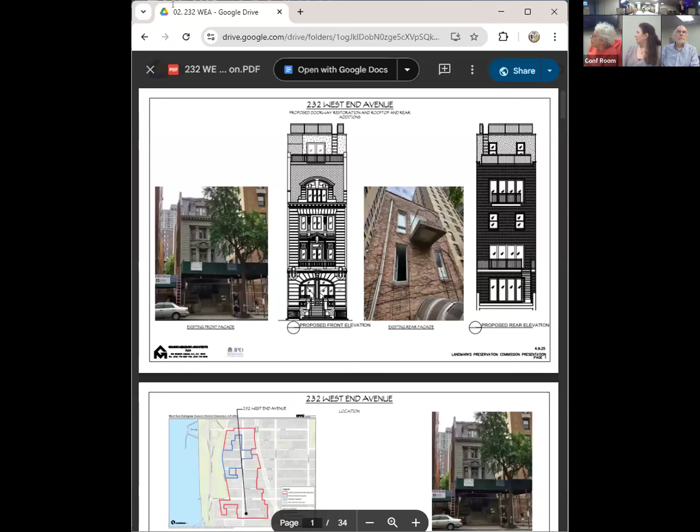I live across the park - do you want me to just go home, get my laptop and come back with it? We can see it on this laptop, but it can't project on the screen. Is that the problem? Yes. Do you mind if I take a quick look? I don't mind if you take it home with you - that's why I came and robbed you guys.

Still no signal. No signal. Jessie, who's been in and out of our room with our staff member, is quite the expert at all of this. But obviously it's not just this tonight.

Oh hey, okay, all right then. It got the menu - magic touch, it just wasn't plugged in all the way. So I'm going to sit here and advance slides. All right, you're the hero of the night. Isn't it the first thing on the list, make sure it's plugged in?

So hello everyone, my name is Jackie Peu-Duvallon. I'm the preservation consultant on this project. This is 232 West End Avenue, a Beaux-Arts style mansion located on the east side of West End between 70th and 71st Street. The proposal is pretty simple.

It's to replace infill at the entrance and on the front facade, to construct a rooftop addition, and to remove a rear addition. Currently this building - try not to touch this - here you can see it located on the block plan. Most recently it was used for an institutional purpose, and for that reason, my understanding is it was able to get this very large rear addition that currently extends to the rear lot line.

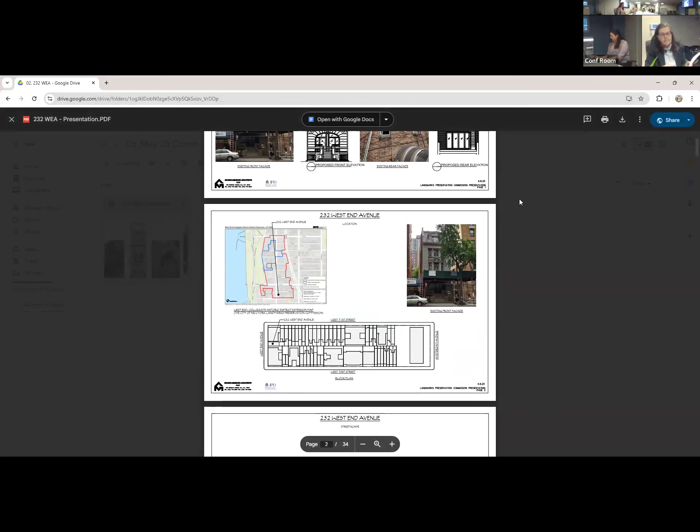If you're going to go to the next one, just let me know - I'm actually sharing from my computer. Sorry, next one please. Jessie, can we get full screen?

That's all right. This is good enough.

In any case, it was serving an institutional purpose, so that's why it got this large rear addition, but now it's returning to residential, and that is not going to be allowable by zoning, so that's why it has to take off the existing rear addition.

So here's the entrance that I was talking about. Unfortunately, any vestige of historic entrance infill is gone, and it was replaced by this institution prior to designation with really just glass walls and glass doors. So that's what's photographed here.

But yeah, so because this is the best photo we have and because it's hard to extrapolate what exactly was there, that's why this part of the proposal also has to be presented at public hearing. But our intention is to try to replicate what was there originally.

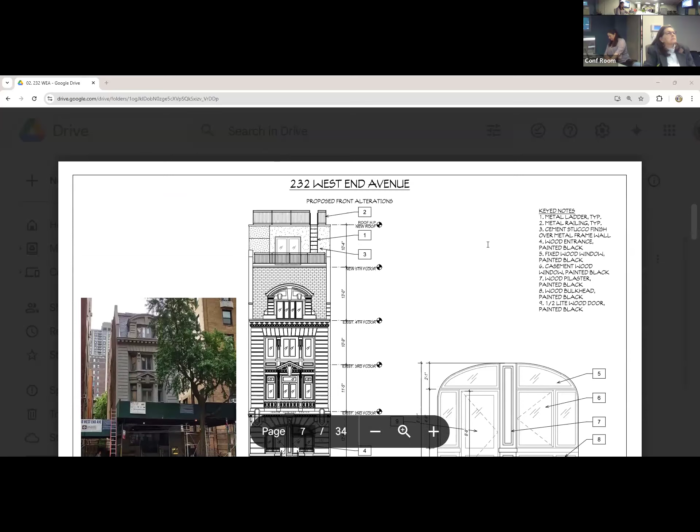Okay, so here's the proposed condition, the full building elevation and the close-up elevation. So again, it'd be a door with a solid panel at the bottom to match the panels underneath the proposed windows, with that wide center mullion.

So all of that is new, replacing what's there now, trying to replicate what was there originally, as far as we can tell. Is it offset, double doors? No, it's a single door, the others are fixed. Just the one wider window would be operable, swinging out, but the windows on the sides would be fixed. Off-center door, center panel made of wood.

It looks like only 3 floors were original. Something happened to the roofing that you can see on the left in the picture. So it's kind of a hybrid. Is the roof in question? Well, yes, we're proposing a rooftop addition, but that's the original roof, that mansard with the arch. So the question is, this application will go from where the top curved window upward will be new - a setback rooftop addition.

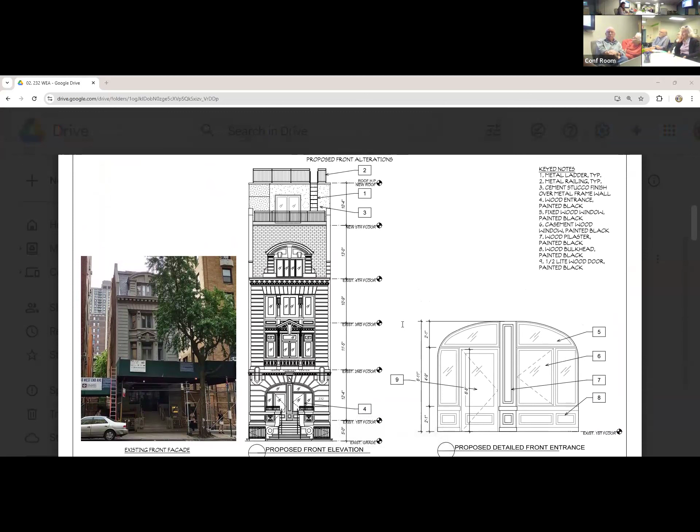How far back is this panel door and window setback from the step? Well, it is essentially an exterior porch. It's going to be set back to where we think it was originally, which is about 2 feet back from the opening. Currently it's about 2 feet at the front of the facade, but no, it's set back further - the existing glass walls and glass doors are already set back well into this. And would it be the same setback? Yes, same setback.

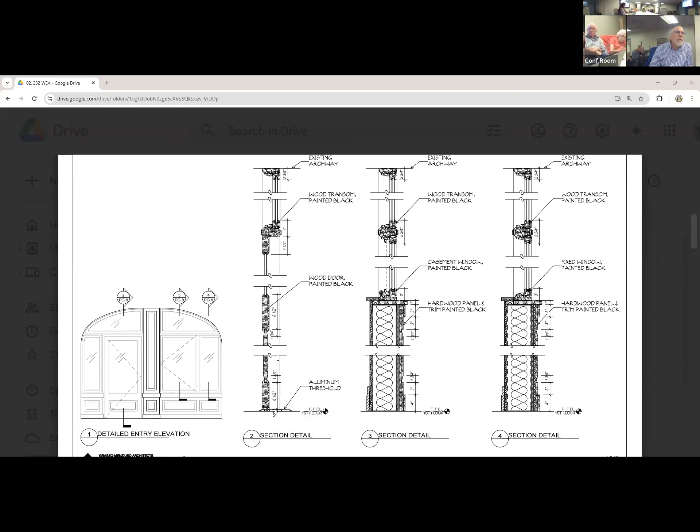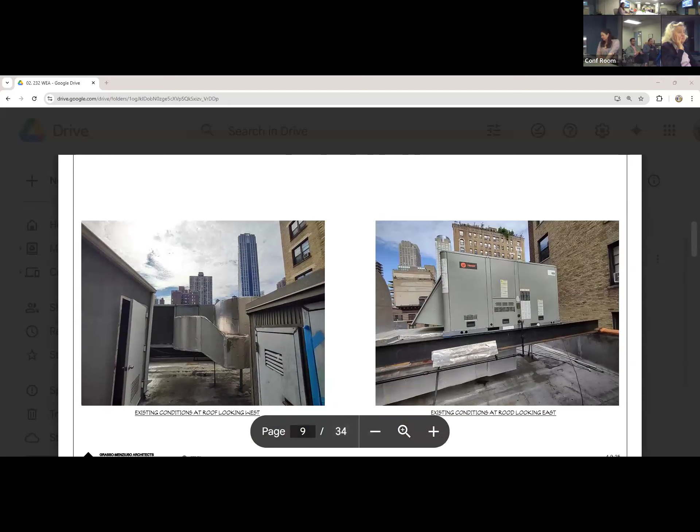Okay, so now we get to the roof. There's already a huge conglomeration of mechanical equipment on the roof. It's actually pretty difficult to even walk around the roof, so these are the best photos I can get. We have a bulkhead, mechanical enclosures, ductwork - it's a very, very busy, packed roof already.

Right, okay, so the setback - should we call it the roof terrace? The proposed roof terrace is essentially the setback. Yes, say that, yes.

And this addition then would be a bedroom and a bathroom and maybe some elevator. Questions about the elevator - it's kind of tiny, is that going to be modified? And will that go up to the roof? Because right now it looks like it does. Yeah, there is an elevator now. And that will stay, so the bulkhead and everything will remain? Yes. There's an elevator and staircase in there now, but it doesn't go up to the roof - it's going to extend to the roof. Yes, got it.

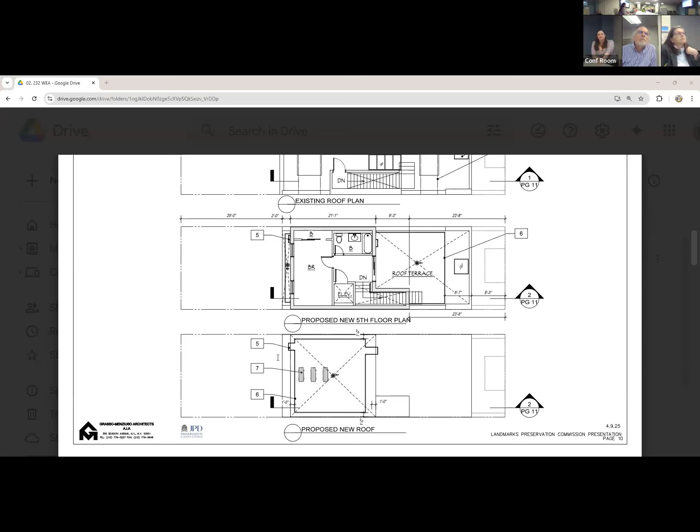Thank you, next slide please. So here are sections through the roof, existing section, proposed section, to show you the heights of the addition - about 10 feet tall, with mechanical equipment on top of it and railings on top of it as well.

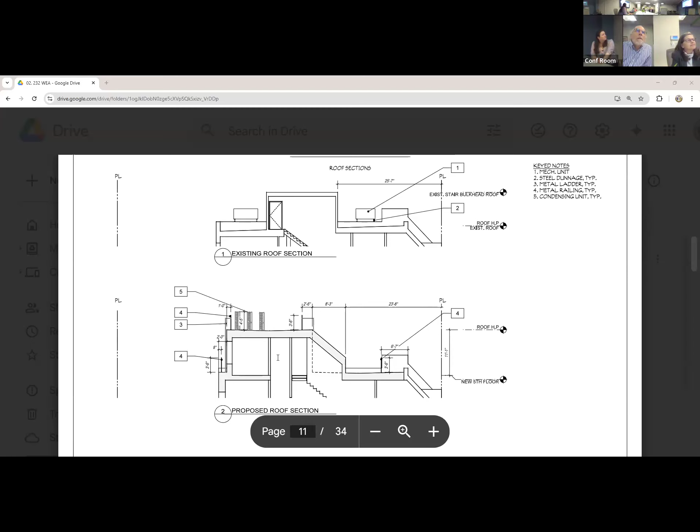See how it's being angled back to minimize any visibility over the front facade, and set back 2 feet from the rear facade. This is a somewhat unusual brownstone, sitting in the middle of a block flanked by two large apartment buildings, with a small alleyway on each side. That's the reason this rooftop is visible, because of these two alleyways, so you can kind of see it up there.

So what materials on the two sides are going to be visible? Stucco. What color? It's the cream colored stucco, but we can adjust that. You're welcome to give your comments on that as well.

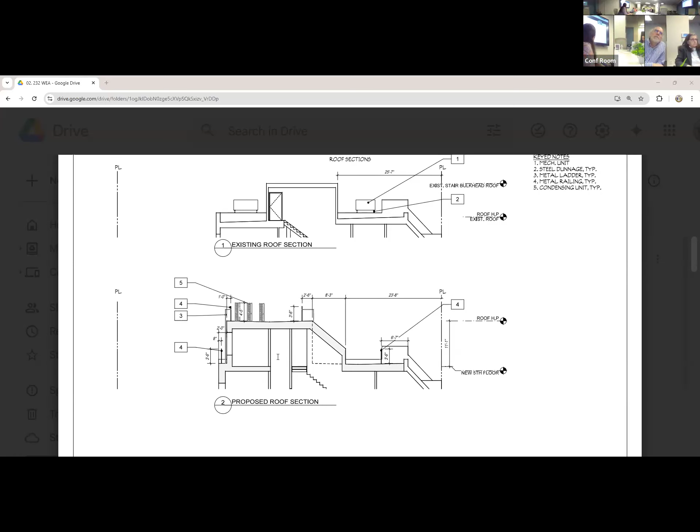Should I move to the next slide? So, existing and proposed west and east elevations, looking at front and back. Why are there doors on the west? Because that goes to the terrace at the front of the building, facing west. The rear is very close to the rear facade, not the lot line, and just has 2-foot windows, a 2-foot setback, which is a dimension Landmarks has approved many times for rooftop additions.

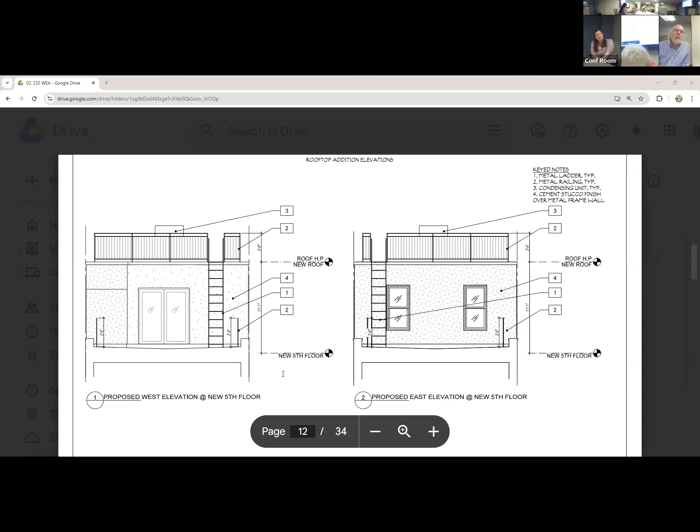And then a ladder from the fifth floor addition up to another level, just to be able to service mechanical units on top. So it's not used as a terrace up there on top, it's just where mechanicals would be kept.

And what material would the railing and ladder be? It's painted iron. It's a ladder, not stairs, just painted iron. What material is the whole facade? It's limestone.

So it's a gray line. What would the West End Avenue facade be? The same color stucco, so a cream colored stucco, but set back, so not visible from the west. Visible from north and south as you're going on West End Avenue.

So this is a sightline study documenting that when you're standing directly across the street on West End Avenue, you don't see it. It's when you start moving to one side or the other, because you're seeing it on an angle.

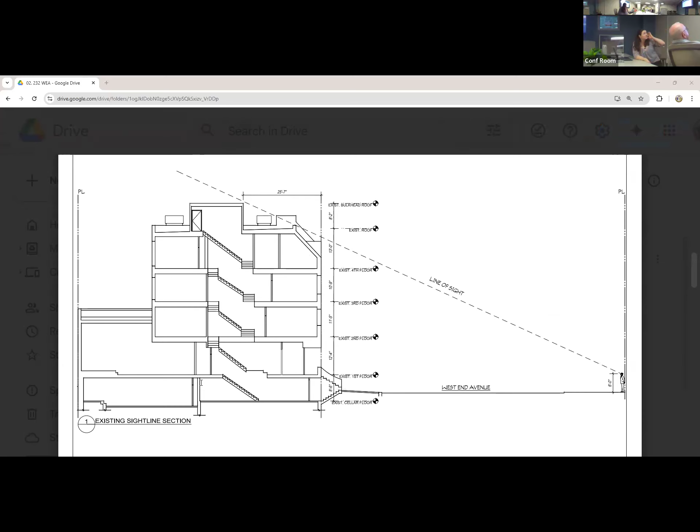So this is our existing building section, and just so you can understand, that's what the gigantic rear addition currently looks like, that's going away.

Okay, so here's the proposed, again showing the addition angled back to limit its visibility in conjunction with the front facade when directly across the street, and the removal of the rear addition at the back. The red dotted line indicates the volume of the existing building. So when the rear addition is removed, what does that leave as the depth of the rear yard?

Hopefully we have that on another plan, I don't remember exactly. Because it's on an avenue and not a side street, it may not be the typical 30-foot setback. What we'll replace it with is just a brick facade, and you can see an open deck with a stair going down into the backyard.

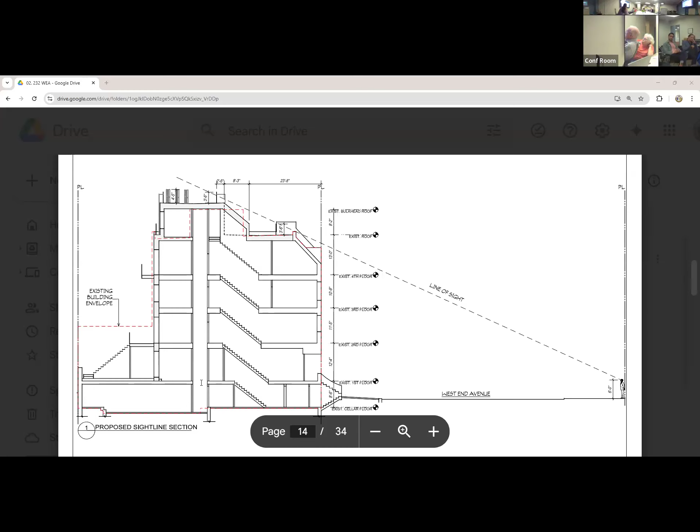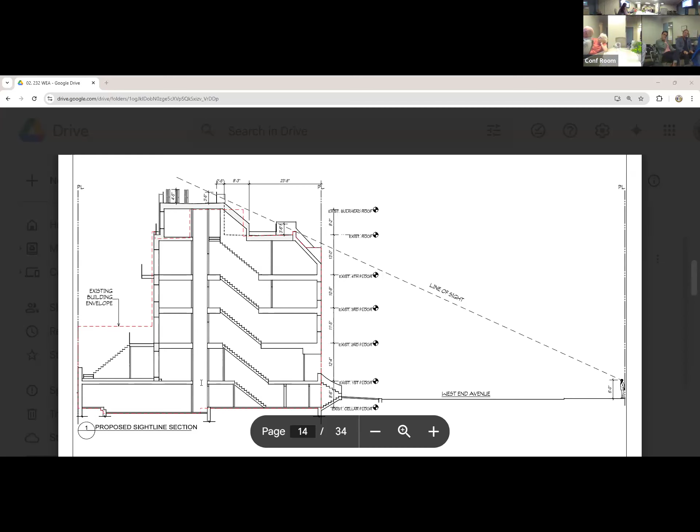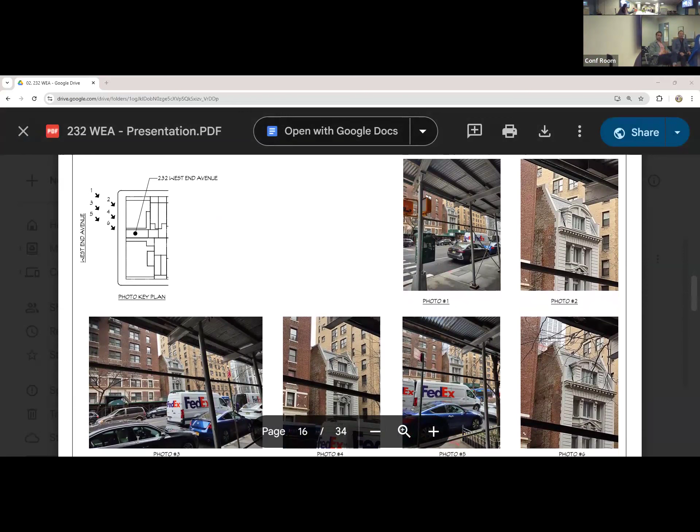Okay, so now these photos are taken walking north to south. We're at the corner with 71st, and as you can see, I had the regular shot and then the zoom-in shot next to it. So as you're progressing south, this is what you see, pretty much.

I would note that the existing mechanicals are themselves, from many angles, already visible. What you're seeing is this gray massing, that's the existing bulkhead that's there. This is existing ductwork you're seeing over the front facade, that's going away.

So this ductwork is going away, but this will become the railing on top of what would be the new addition. What I'm trying to point out is that you have an existing addition that's already visible there. Those side walls are just old brick stucco.

Are you talking about the full facade? The full lot line wall is brick, of course. This bulkhead that's there, are they going to do anything with that brick? If necessary, I might point it. That's about it. It's a lot line wall.

So there are no windows on it, even though there are two alleyways between this building and the others, there are existing lot line windows. You can see them. But there's no work proposed at the lot line windows in any case.

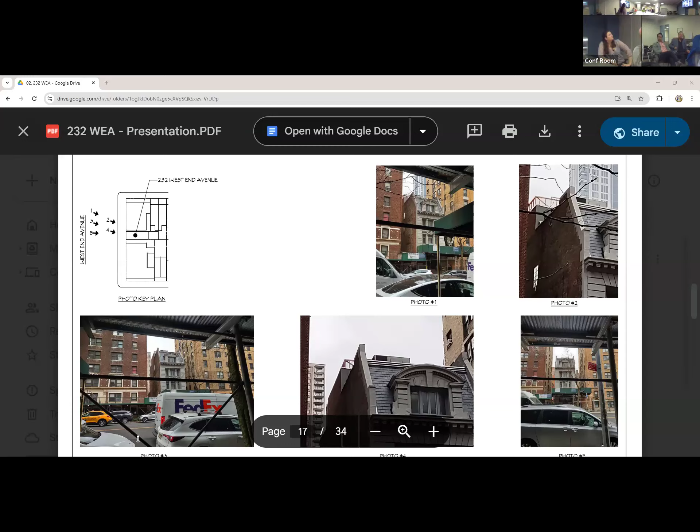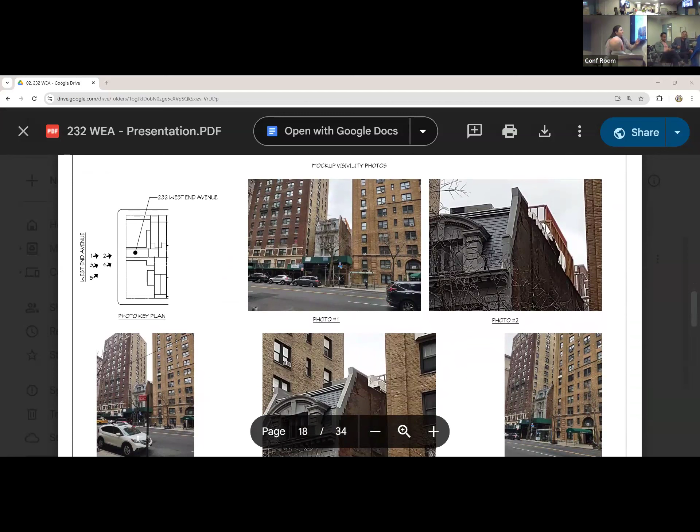Next slide please. This is as we're walking further south to show you what becomes visible. Again, you can see there's existing ductwork visible, and that ductwork would go away, leaving just a plain cream colored wall. This ductwork here in the front would go away.

Next slide. As we progress more south, it starts to get blocked by that neighboring apartment building. The last two photos on the right show that you do see a bit of it as you're standing on the sidewalk next to the building. It was hard to get that photo because of the sidewalk bridge that's there, so those were the only two points where I could stand and see something.

Why is there a sidewalk bridge? Has it been ongoing work? It's on the neighboring building, nothing going on with this building right now. The neighboring building is obligated to extend it. We're going through it now on both sides. Don't ask, we have lawsuits pending with our building, the two brownstones on either side, and the other apartment house on the corner, making lawyers happy.

Are there any more slides? I think I just have a little bit more, we'll just wrap it up. Next slide please.

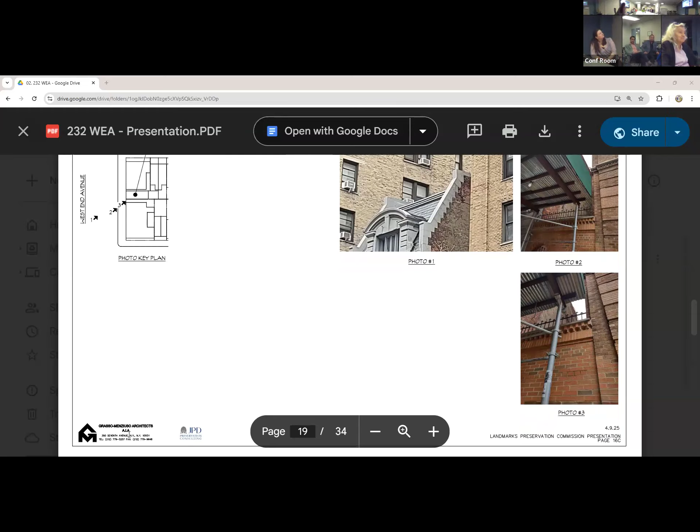So this is just a block plan to show you where there are other existing rooftop, one-story rooftop additions within the block, so we're contextual in that respect.

What's the height, one story? You mean in terms of feet of these other ones? No, of the house. Sure, it's about 10 feet, 10 feet.

So the crosshatched area on your building, that's the rooftop addition? Yeah, that's the proposed one-story addition. And that is actually telling us, if we could measure the depth of the rear, what the rear yard is, which is about the same depth as the rooftop addition, whatever that is.

I don't know if this is to scale, but the rectangle behind it is your rear yard. Right, which will now be your rear yard again, nothing built on it, other than a staircase down, right? Right, an open metal deck and a staircase down.

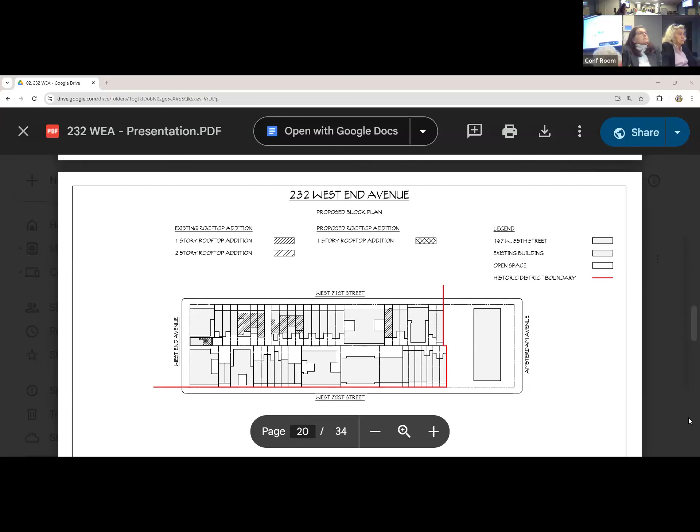Next slide please. So this is as much of a photo of the rear as we can get. This is what's existing at the upper floors, and this weird round thing, we call that a skylight. That's the current roof of the two-story rear addition that now extends to the rear lot line, which is going away.

What about that diving board balcony thing? We are proposing to keep a balconette, not that particular one, but to replace it with something else, similar projection, yes. So next slide please.

Can I just ask quickly, is there a fire escape planned? How are you going to be handling that, or is there enough room between the sides of the building? I don't have an answer to that. As far as I know, this meets egress requirements, if that's what you mean.

Just if you could verify what that is, because these are kind of difficult projects to come into. Well, this would be a one-family house, that's what I was gonna ask. Probably so, doesn't that still require it? It still does, under certain codes where you have buildings up against open windows and things like that. But it looks like you're making a lot of changes on the rear, with a wider balcony and a set of four conjoined windows.

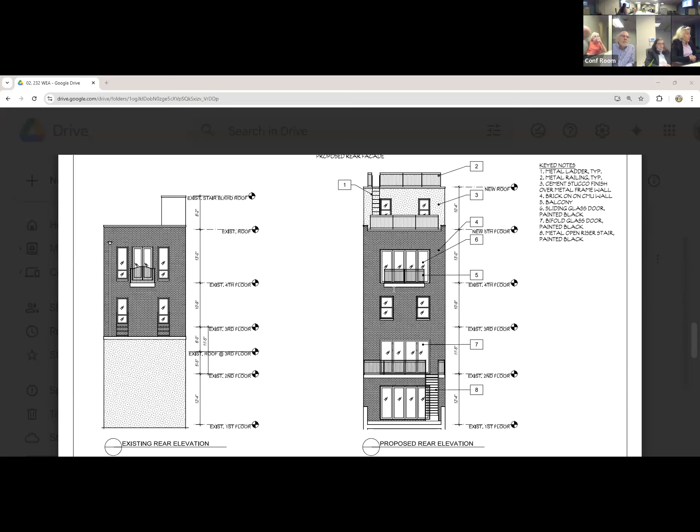Next slide, please. This is just a plan for the existing rear yard, which is really the roof of an addition, and the proposed rear yard.

Jackie, why would it be entirely hardscape? In this committee, we try to really encourage not just permeability between pavers, but greenery. I don't have that answer, so if this committee suggests introducing it, we always suggest it—I mean, there's not a tree, there's not a bush.

And it's not clear to what extent these pavers are green, native grass. You know what the pavers are proposed to be? Bluestone. But how would they be sitting? On sand. With mortar or? No, just sand—it's better, 2 layers of gravel and then sand between. All right, well, I suspect we're gonna propose some green.

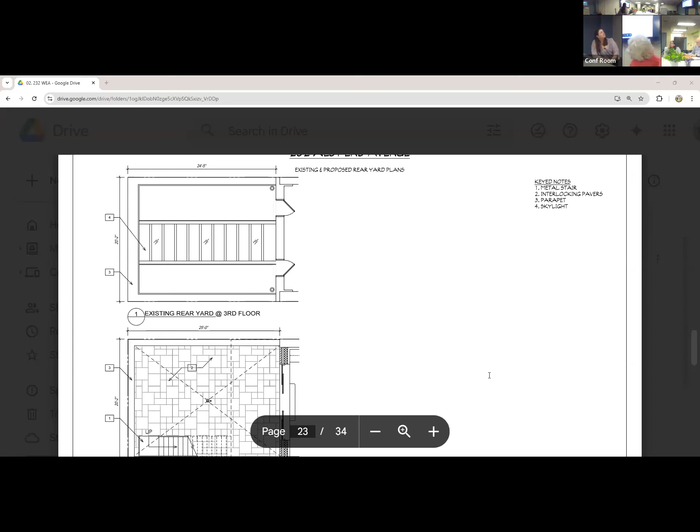And at the back, it would just be an open stairway and a deck. If this is accurate, and you're removing the big volume over there, it looks as if this protruding balcony and the stairs go almost to the rear lot line, so that whole paved rear yard has this balcony and staircase looming over almost all of it. Is that right? No, that one looks like a third.

Not really—isn't this all the paving area we saw? Yeah. So why does it go so far back? Because you have to have a balcony that comes out enough to be wide enough to be accessible, and the staircase has to be wide enough, with the rise and run as required. This is totally appropriate and totally normal.

Staircase has to be at a certain perfect angle. Yeah, that makes sense to me. Any more pictures? I think I have at least a conclusion coming. I think we're almost done. Good, next slide please.

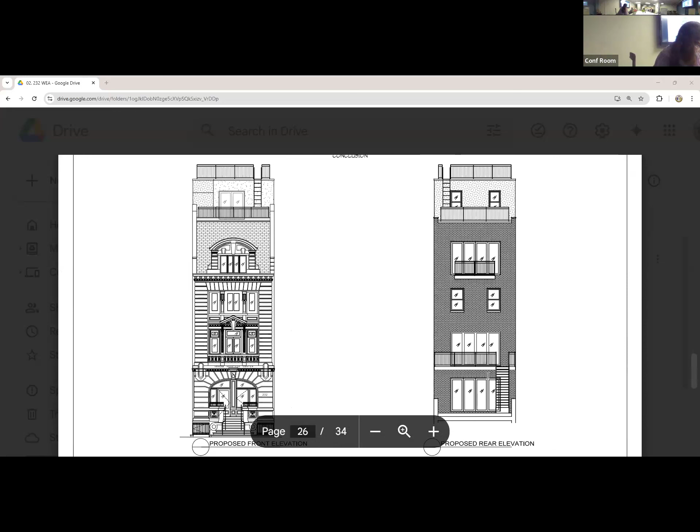So, to me, this is pretty sensitively approached work, where they're trying to restore the front facade to its original condition, create a rooftop addition that will be visible, but hopefully recede against the sky, being a light color. Also not be that much of a departure from the size of the additions and various mess of mechanical units.

I'm going to ask it anyway, even though it might break your heart. This building has enormously beautiful stone, et cetera, and then you go to the top - first the penthouse, and then the iron railing. Is there money or desire to put something that doesn't look like a barbecue in the park? Because the building is really very pretty.

The railing setback you see on top of the mansard roof, is that what you're talking about? That's not going to be visible. The rooftop addition will be visible, but the railing itself won't actually be visible from anywhere - I live across the street, like a block away. West End Avenue is not wide enough for you to see on top. You can't see anything up there, even from down the street. If you go to the third floor of the building across the street, fine, you can see it, but there's no way to see that from the street.

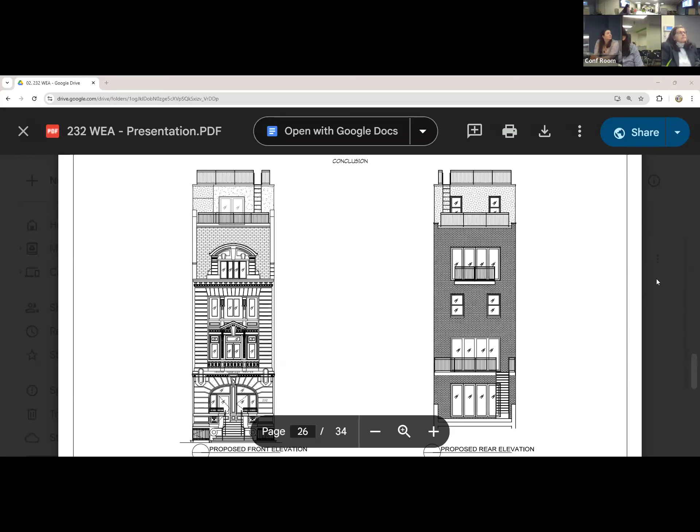I trust your eye. Thank you. Okay, any other questions, comments? Let's take a vote.

Are you guys here to make - what about discussion? We're asking you to comment. No, you asked for questions. Should I exit? No, I didn't comment. No, you can hang out, stay. Okay, if you want to leave, you're welcome to, but it may be helpful if we have questions. Yeah, that's fine.

I have a comment, which actually relates to the question I asked about the side. To me, the most unattractive part of this project is the old brick walls. So anything that could be done - generally we don't favor painting brick. I think it's important to have the brick there, that's the original brick. I think doing something to that would be counter to historic preservation. The Landmarks Commission definitely wouldn't want the brick painted.

Yeah, because that's bad for vapor permeability. I'm sure the owner will clean them, or point them, do something. But it's in pretty bad shape. When I looked at it, the brick looks like normal brick you'd have on a side yard - the row house was built, I assume, with other row houses next to it that came down, so that's the original brick. Is it as discolored as it looks in the slides?

Yeah, but I think you run into this problem where, if you - we already have this problem on the Upper West Side - when buildings do brick replacement, they replace it with clean brick and then it looks worse. I live in a building like that, and we're doing more of it. I think we should just leave it where it is, and if in 15 years the owner decides to clean the brick, great; if not, I think it looks fine. But he's going to have to clean the brick anyway, because there are going to be crevices and issues.

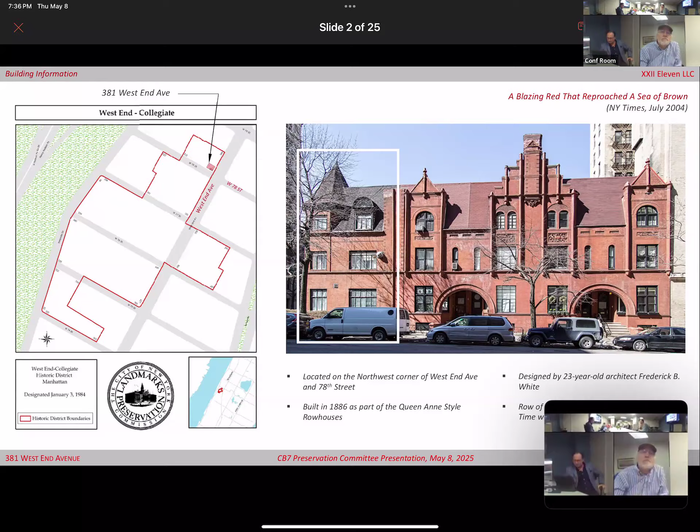That brings us to 2018, when the board had a resolution on this building. You heard the previous owners and the previous architects. The previous architects did a fantastic job, by the way. I was very happy with what they designed and what they presented.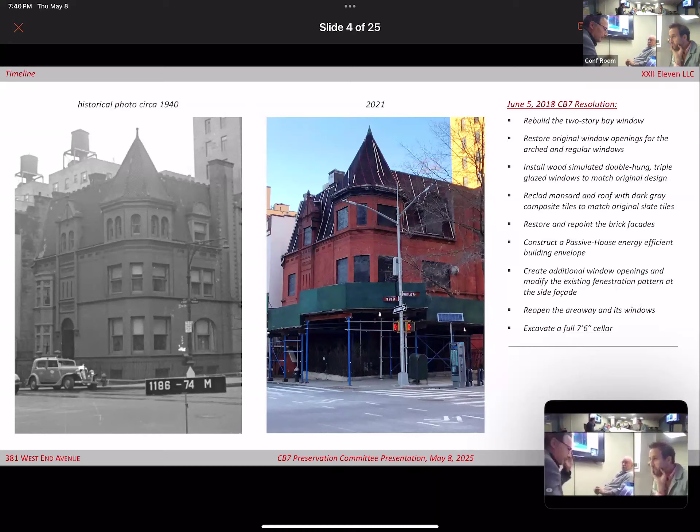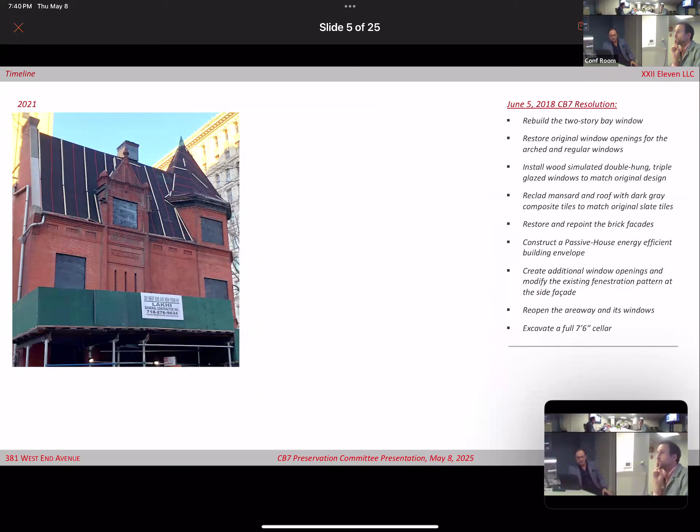So I want to bring you through some of the restorations that we made today. This is how it was in 2021. This is how it looks now.

What's the material of the roof? Is that slate? It's composite.

We rebuilt the two-story bay window, as you can see. We restored the original window openings, highlighted on the right, but they're hidden on your screen. We installed wood simulated double hung triple glazed windows.

I think what I loved about the previous design was that they designed this passive house style. Everything is insulated. Usually we were taught that the house should breathe and have openings, but this house does not breathe. All the windows are triple glazed, all the walls are triple insulated. Obviously we introduced fresh air to circulate, but it's a very low energy demanding house.

You didn't go geothermal with it. I did not. Got that basement? No, not anymore. So we reclad the mansard.

I think it's just a loose connection. Give it a second. Oh yeah, it's coming. Okay, great, I think you just tripped on it. Yeah, good. Perfect, we're back. So I'm gonna try not to touch anything at all. Right, it's a real loose connection.

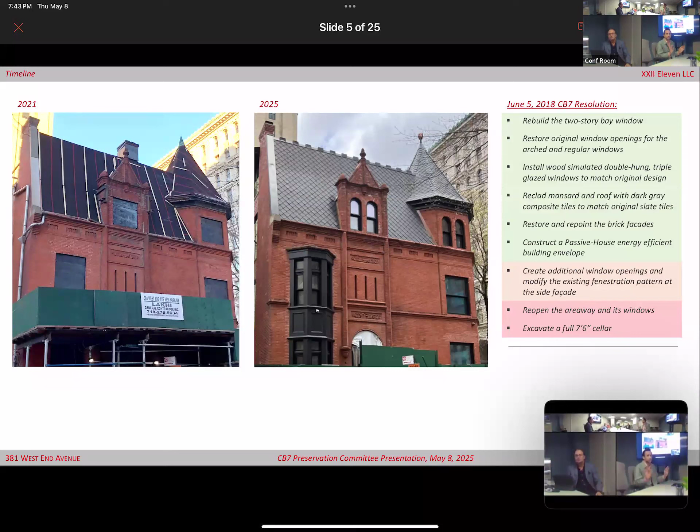So some additional items added during the restoration. We structurally rebuilt this dormer here, this south dormer. As you can see, it was really in bad shape. It was held on by stitches, so to speak. So we had to bring it down brick by brick and then rebuild it to mimic the old layout.

We reconstructed the cornice detail on the turret eave. This is a picture from West End Avenue, back in 2021, and this is how it looks now.

As you can see, we rebuilt this, I call it the East dormer. We rebuilt every detail here. We couldn't really salvage what was there, it was really in bad shape. So we took the material, sent it to a shop in Connecticut, and built it from scratch, down to the small details.

And then most importantly, we rebuilt the east chimney. This is worth emphasizing: the east chimney was not part of the scope of work, it was not required to be rebuilt. Two months after we changed everything, changed the project, we got rid of that roof addition, we set it back even more.

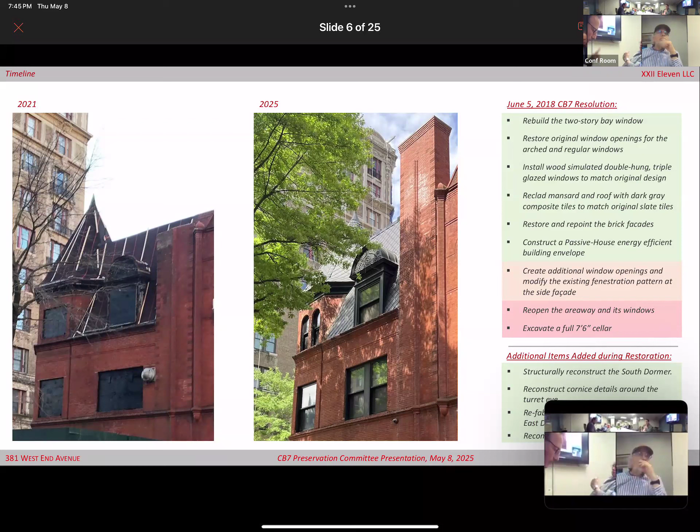All right, so in conclusion, this is how it was, this is how we found it, and this is how it looks now. It's still progress, which brings me to the first item I want to discuss today with you.

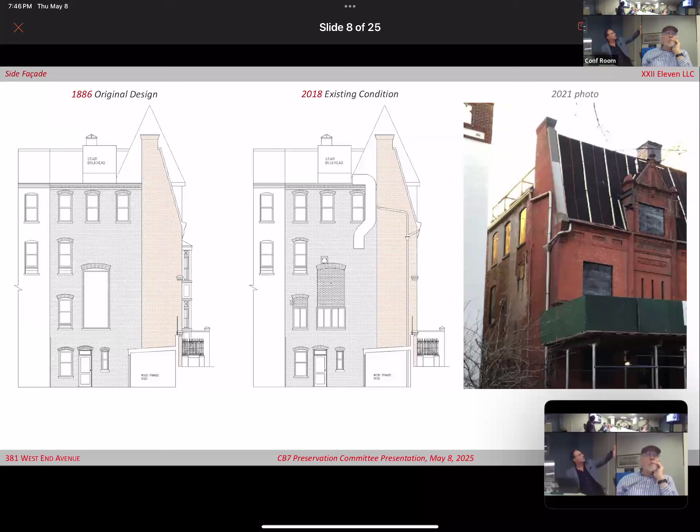It's important to note that the original design is clearly separated between common brick on that line I drew and face brick on the other side. So the architect knew that part of the facade is only this 9-foot face brick, and the rest is just common brick.

As you can see, the same architect that designed these very nice, aesthetically pleasing facades didn't really give much thought about the west facade. It was mainly driven by the interior layout.

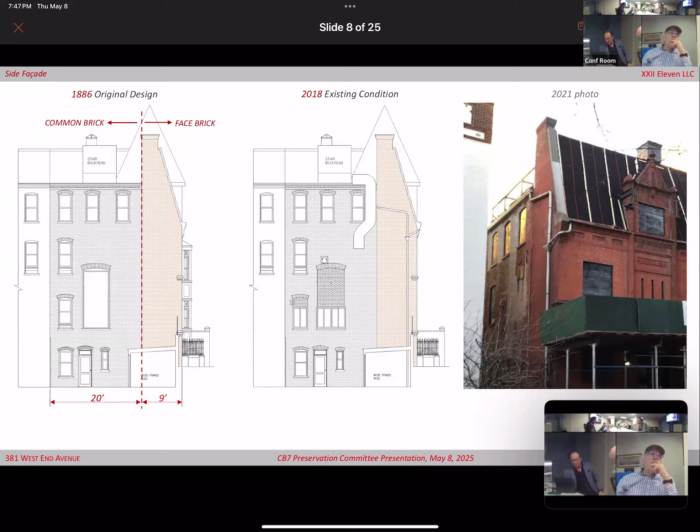Was the big window there on a staircase landing? Is that why? I think it was aligned with a staircase, but again, I cannot say that with certainty. But the former architects did the same - they basically aligned this window to serve the interior layout.

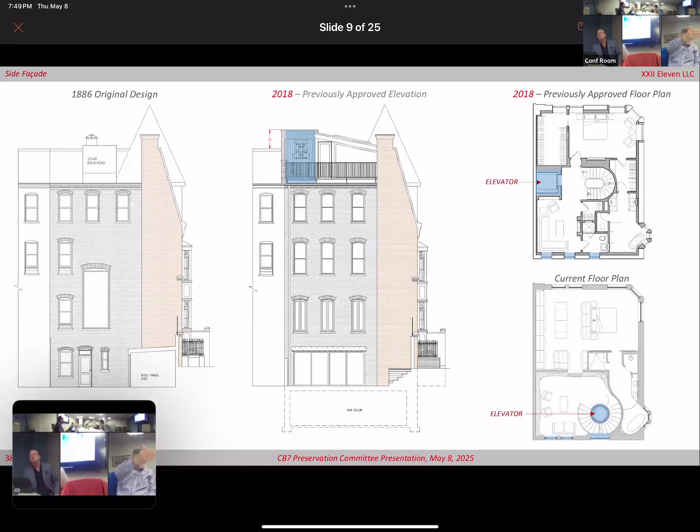Correct. So there's a round elevator or something at the rear yard - with stairs or around? Side yard, yes. How deep is that? Almost 10 feet, just shy of 10 feet. Is the elevator going all the way up to the top? Yes.

So again, this is not what we're building. This was previously reviewed. The middle is the previously reviewed version.

And I repeat that this addition here, which was 50 inches over the mansard, was disapproved by this board. It was visible, I understand why - I think it was casting a huge shadow on the neighbor, and the neighbor was not happy with it. So even though LPC approved it eventually with some modifications, the neighbor was still not happy with it, and that's how the lawsuit started.

And it wasn't built, correct, it was not built - but the elevator has already been moved. Nothing of this was built. That's the current floor plan. The project was at a standstill, it was stalled until 2021 when I took over.

Right, but when you say current floor plan, that's what's done already? Yes. Very different interior. Oh, yeah.

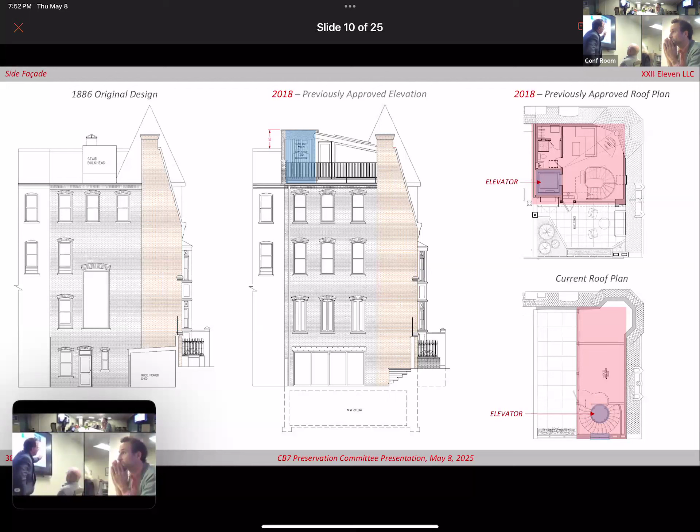So this part here and this part here are open to below. You come out from the stairs, from the third floor, you come to this level, you have an elevator landing, a stair landing, and then you go outside to the roof. So this is what was approved by LPC at staff level.

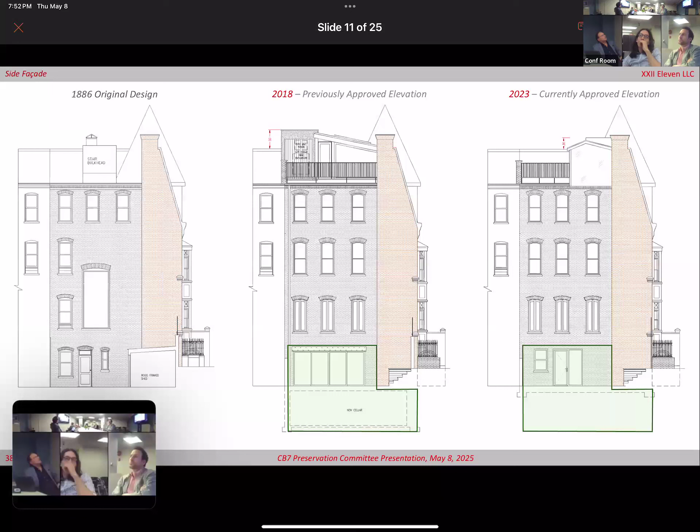So at the time, we were just trying to pay attention to that rooftop addition. We said we will not do what the former owner was intending to do. And by the way, we're not going to build a cellar. We made those decisions for one reason really, just to pacify the neighbor, because building a cellar would have required underpinning, which would have really inconvenienced the neighbors. And the rooftop—they were never happy with it, even though LPC approved it. So I said, you know what, let's just scrap both of those and simplify the design of the building.

So here we are in 2023, this is what was approved, which brings us to what's being proposed. So this is what's being proposed. Notice a couple of things.

First, we never touched the face brick part of the west side. That stays, we didn't want to play with that. We kept the same amount of windows. All we did was take this and align it with the aligned windows, in that kind of layout—just like the original layout, and I'm keeping the original layout here for a reason, to go back and compare what it was.

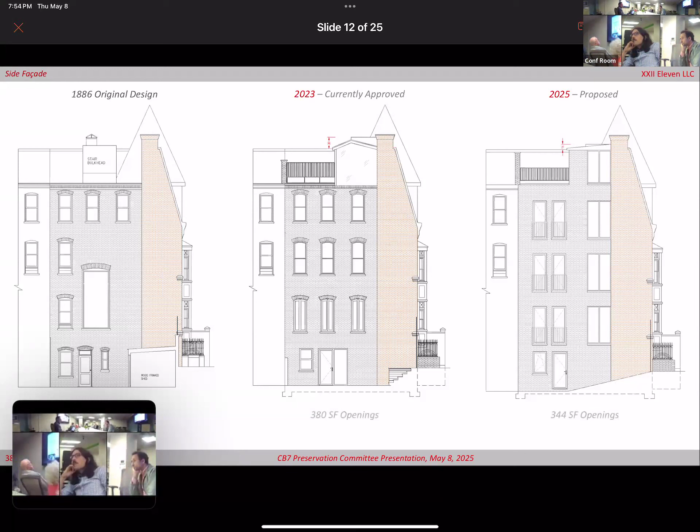This side was driven by the interior layout, this was driven by the interior layout, and this new design is also driven by the interior layout. As you can see, these windows align with the elevator, so the approach is for some light to come through the window and get reflected in the glass elevator—it's a glass elevator—and then diffuse the light indoors.

It looks like you're eliminating those that I think are original wooded windows. Yes, so it's on that floor and others, for straight rectangular modern windows with Juliet balconies over there. Yes, yes, that's the intent. I mean, it's striking to me that you've tried so hard to replicate original features on the West End and 78th Street side, and then completely un-historicize this facade.

I just took the architect's opinion—he literally drew a line there and said, this is face window, this is face bricks, and this is just common brick. No, I understand, but in my view, the original architect didn't really care about this facade. He designed this on this facade, so he clearly did not pay attention to what was going on here.

This design was driven by the interior layout. We're basically doing the same—we're driving this design by the interior layout, and this board agreed basically on how insignificant this elevation is.

But this is the hardest part of my presentation. This was already built. These windows are all—yes, so these on the left.

On the left side that you can see. So then I don't partially understand—you're coming for approval of, did you get LPC staff approval or any other approval? No, so this is a legalization. Let him explain, it's not legalization. You can term it that way.

Let me first explain why it was built. It was not built out of arrogance or defiance at all. This layout that you can see here, this exact layout, went in front of LPC together with an east chimney. When we presented the east chimney extension, we presented this as well. So LPC said, we will approve the east chimney at staff level, but we cannot approve this—you have to go to the community board for this. And we said, fine, makes sense.

But this was already built. No, not yet, at that point. This is—what year?—beginning or end of 2023, or beginning of 2024. But then it got built, so what happened? She's trying to explain, let him finish.

So I go away overseas in the summer of 2024. We were working on the visual, on the primary facades. I told the masonry contractor, just concentrate on the primary facades until we get an approval from the board and LPC on the west facade.

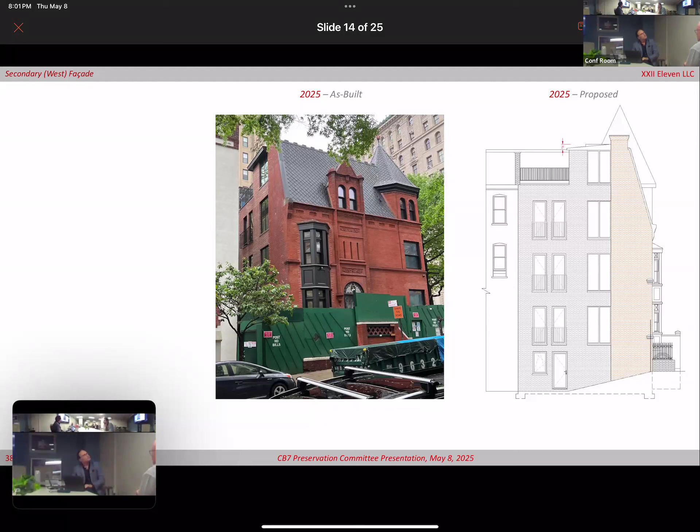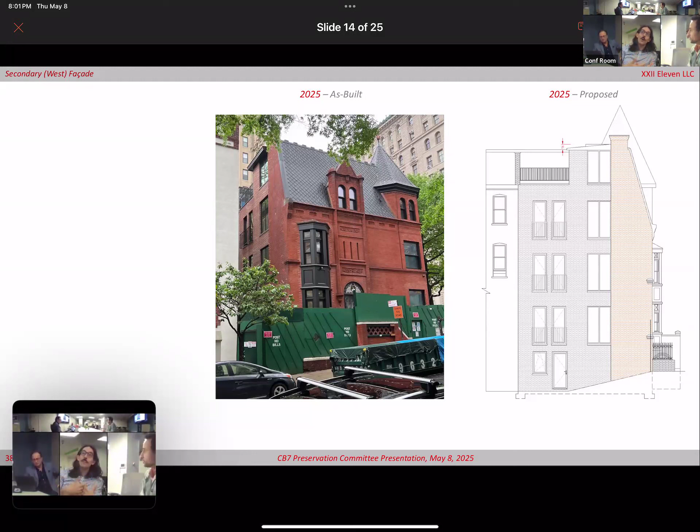I think it's a very fascinating question to understand how this happened, but for the purposes of this board, we're just gonna look at this de novo. Would we have approved this? I understand where you're coming from, but I would encourage us to remember what is our responsibility. No, I understand that, Adam, but I think the history of how we got here has some relevance to our judging.

Exactly, and I'm kind of mystified that it was holly go lightly all over the building. You lost control of your design. You were doing additional work that was not sanctioned, because I tried to look at the filed plans of the DOB, and not all of the pieces are even there.

It's a real difficult decision that you've asked us to look at, because most of the brickwork is new, windows are new, the roof shape is new. Everything has a composite little trinket on it, which may look right, but it's wrong because it doesn't reflect the original building. That's what makes me very concerned about how we're going to look at this project.

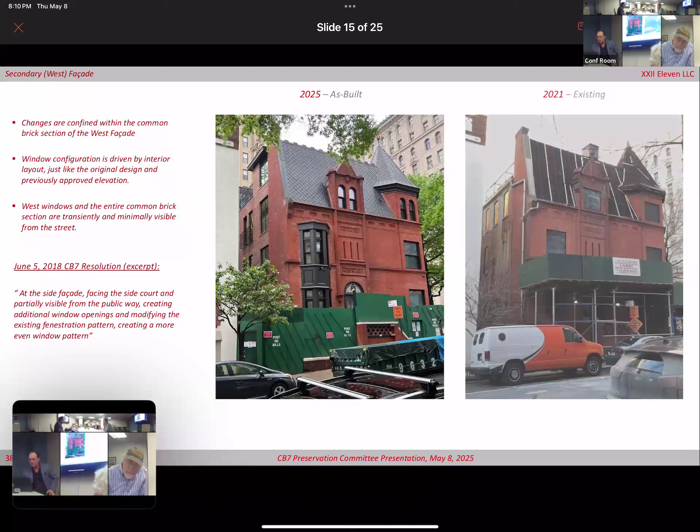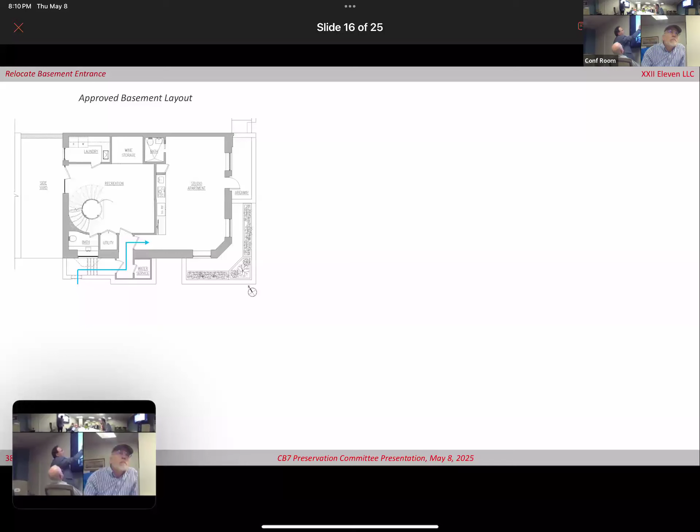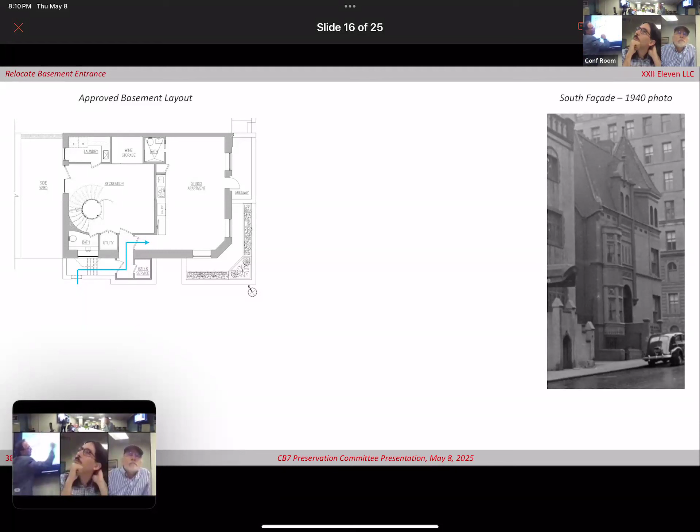As you can see, this is where the entrance was, right here, right under this window bay, the bay window. And this is the elevation that the former architects prepared and approved, this was the approved elevation. So the old entrance was actually from here, but we wanted to emulate the historical pictures, so we have the entrance from here, on 78th Street. Correct, yes. So we built the bay window as you all saw.

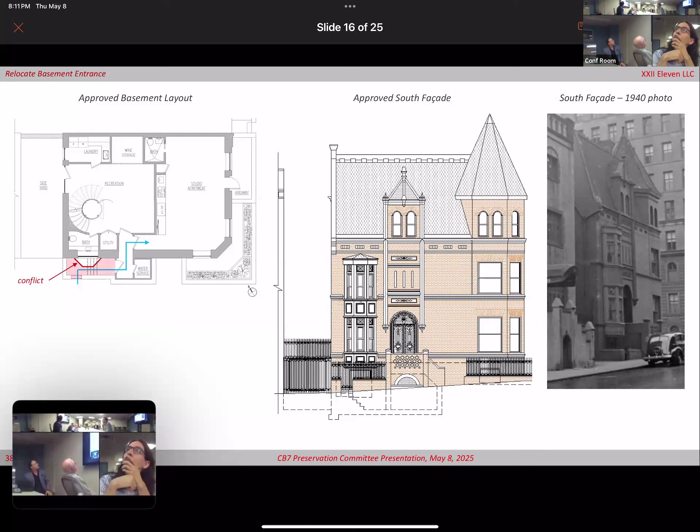So what we're proposing, and this has not happened, sorry, this has not happened yet. You're gonna need therapy by the time you finish this. We will too, I know, that's the worst part.

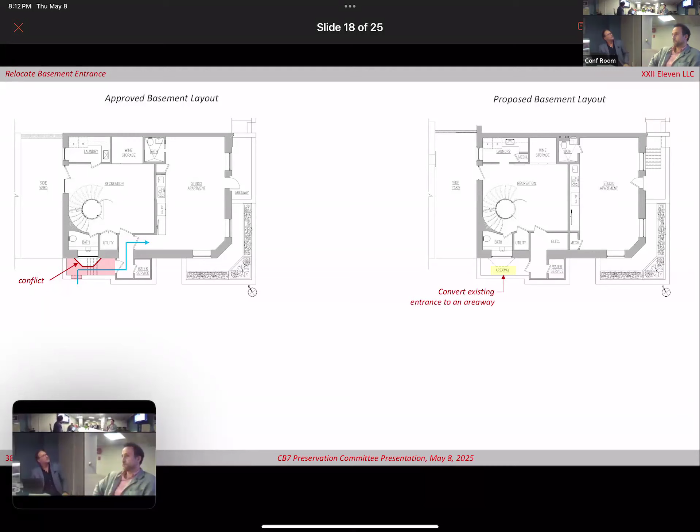So what we want to do is convert the existing entrance to an areaway, since it's not a legal egress, and build the entry from the West End Avenue side instead. This is the approved east facade, and this is what we're proposing: just a stair right here on the end that emulates these other stairs of the neighbors. We'll get to that in a second.

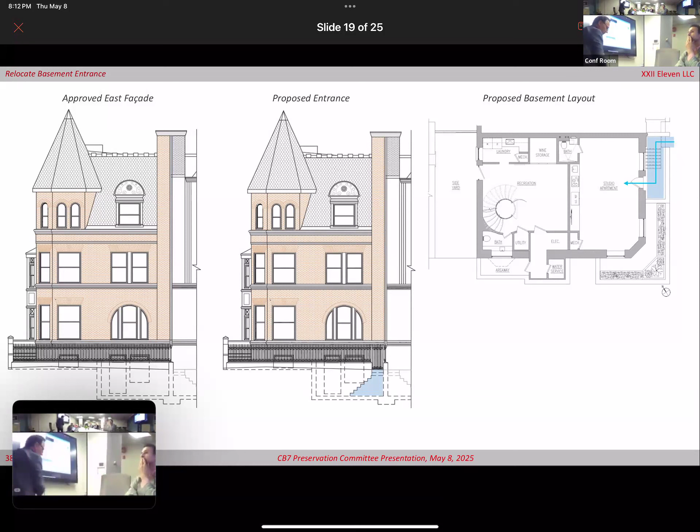Would that be an entrance just to the studio apartment? Yes, that's all.

So I want to take a few minutes to discuss this areaway. We have an actual photo of that east facade now, not of the first floor, because it's covered. This highlighted area in red was supposed to be the areaway. The former architects just made an assumption that this was always dug in, at the basement level.

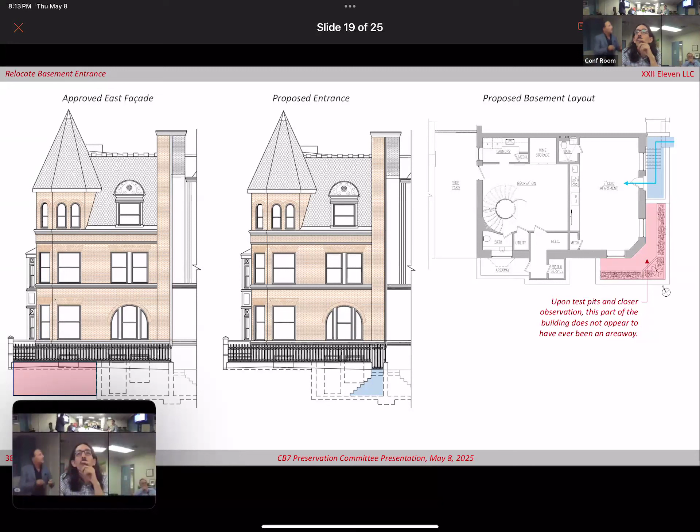What we found when we started these windows full size, hoping we'd be able to excavate the basement areaway, was that it was never actually an areaway, it was never excavated—they just stopped in here. These small windows were always the historic windows. We dug in and saw that this retaining wall was not actually a retaining wall, just over the sidewalk, and there was no evidence of these windows ever being filled. It was just the original windows.

Could you show us a photograph of the West End Avenue side with the other houses? This was approved, or is about to be approved at staff level. The reason is not excavating the areaway and not opening up the windows.

So the reason I'm bringing this up is that I always assumed this door and this full window, which exist there, served the entire areaway, because I thought it was a former areaway. But now that it doesn't serve this and never served this, it begs the question—why would they have a door there and a full-size window?

This is the picture from the 1940s, the tax photo, taken from this angle. You can see the existing door here, and the existing window. I can't think of any other reason why they would have a door there unless they had stairs. Trying to make the case.

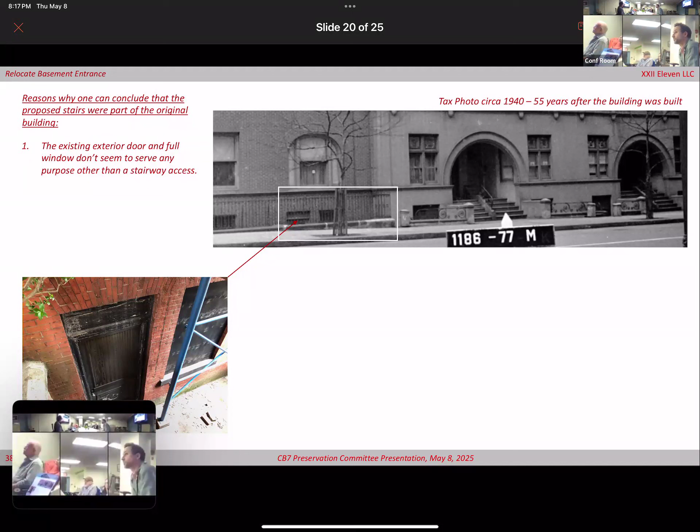The stair back. So how much width do you need to create that? We're gonna find out. It's the same width as the other window, as the other neighbors. Yeah, exactly the same setup.

So reason number two, as you can see here, this is the design pattern that they have. This is the adjacent neighbor. So this one is the first house of the row, I just made a little square there. This one is the other two houses, and this is their basement entrances.

So you want to do the same thing as this. Exactly. The door is there, the window is there, you just need a stair back.

We're only charged with approving or disapproving the stair, the entry, and that cheek wall. The end. So, and here's the third reason, because so far it's kind of a little speculation. No, it's a lot.

So I always thought that this was an existing stair, right? If you can zoom in here, you can visibly see that this color differs from the rest of the curb. So what I did is I did an investigation here and I found that the different color is poured concrete. It's not the original stone. So there was an opening there.

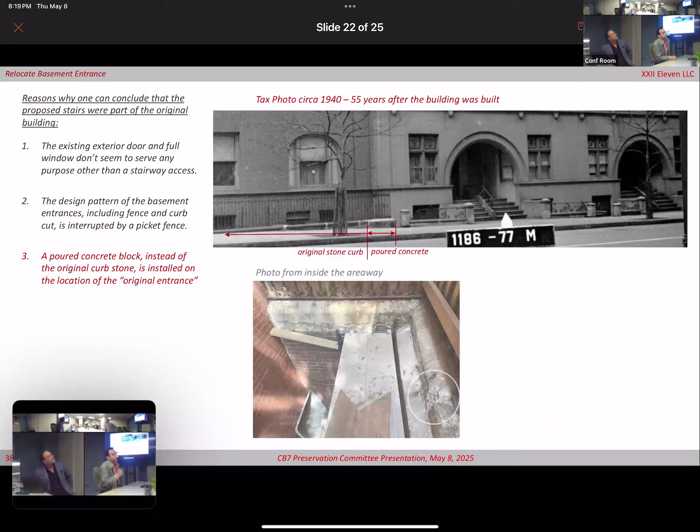Exactly. And then I took a picture from the inside. So I chipped away the concrete. You can visibly see this is concrete, this part here, or this part here, and this is the original brick. So it's hard to not believe that there was a set of stairs there, right?

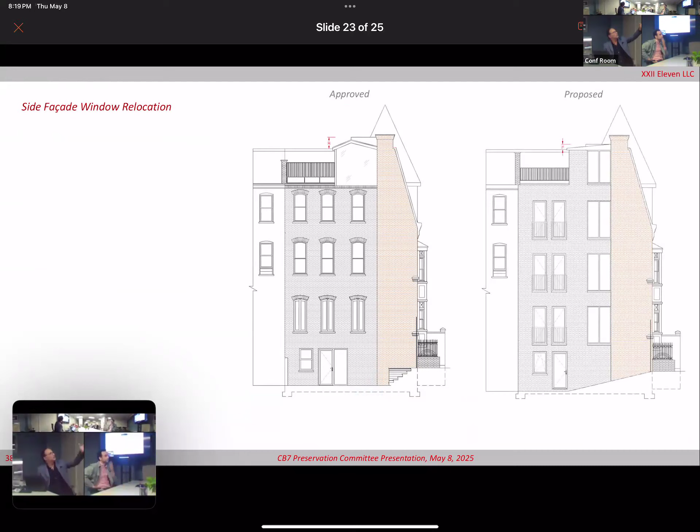So in conclusion, bringing you back to your favorite topic, this is what we're looking for, to go from here to there, and then to go from this approved south facade with a door here to this south facade. This is the only difference. And from that approved east facade to this.

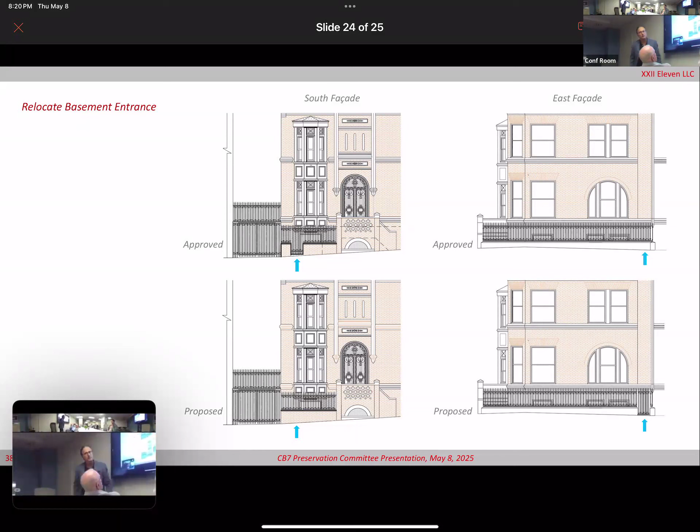I would suggest that you do a mock-up. It doesn't have to be real, but we could do something that will show the different levels and different types of fenestration and things. It's there.

Right, the door and the window are existing, and we're restoring that. And that's been approved, and maybe we'll go back to the slide to see kind of what that entry looks like. Truthfully, that entry is already there on every other row house along West End Avenue, and we're sort of just relinking them all together.

So the difference on the east is the gate stairs. Correct. Can you show that picture? Can you go back to one of those early pictures you showed, not the last one, the early pictures of the whole row of houses? I think it was slide 1 or 2.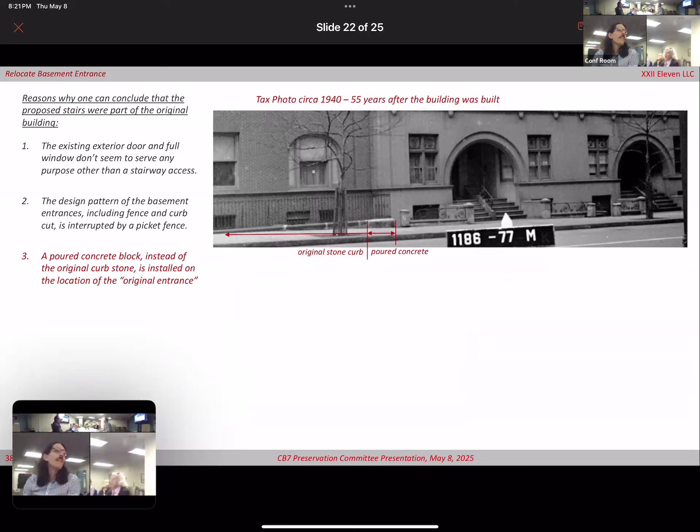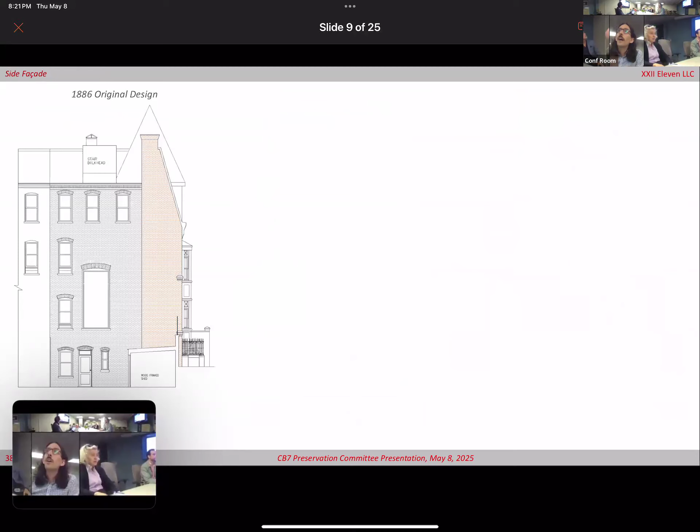Yeah, the full color slides, yeah, it was a good picture. The very first slide. Okay, we'll do that, some patience, sorry. Never gonna ask you for your drawings from the 90s.

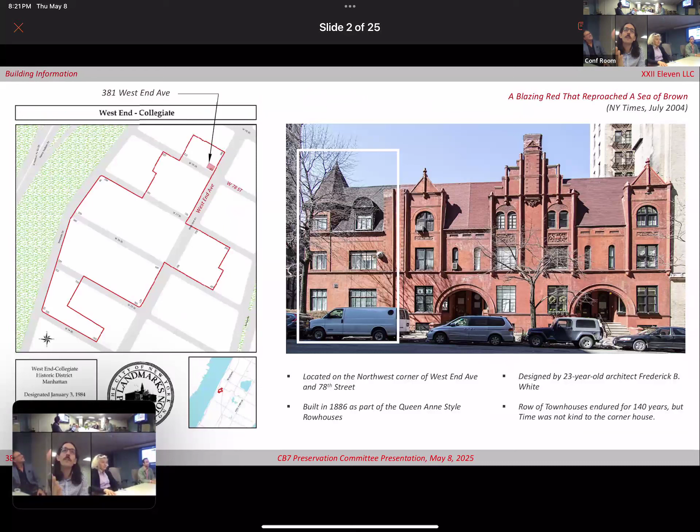Okay, there it is. That's it. Unfortunately, it doesn't do justice to see the low sort of cheek wall and the entry. But again, as you can see, Frederick White in 1886 had done all of these sort of together, making these row houses all one, or all at the same time. And the entry to each of these units, each of these houses, has a separate basement entry. That's kind of what I was saying, there was it, and we're just bringing that back.

When I see between the two cars, between the white truck and the next wagon, that black box, is that the entryway? Yeah, correct, that's the entryway. That's actually the middle building. So you're gonna reproduce that base, and again, the door and the window are already there. It's just the stair that was removed.

So my suggestion is, I think everyone is okay with the new access. So I'm gonna make a motion to approve this new entryway to the studio apartment. But I have a question, the qualification is, we would like to see the documents. No, I don't think we do.

They're not changing where the little staircase goes, where the fenestration goes. They're just putting in a gate and a stairway to an existing door. Paige, if you want more information, I think it's appropriate to vote no on this, but I think the majority of the committee is comfortable with this. I'm happy with what they're gonna propose, but there should be something to memorialize what this new configuration is gonna be. That's what I think we've said. So I'm gonna make that motion.

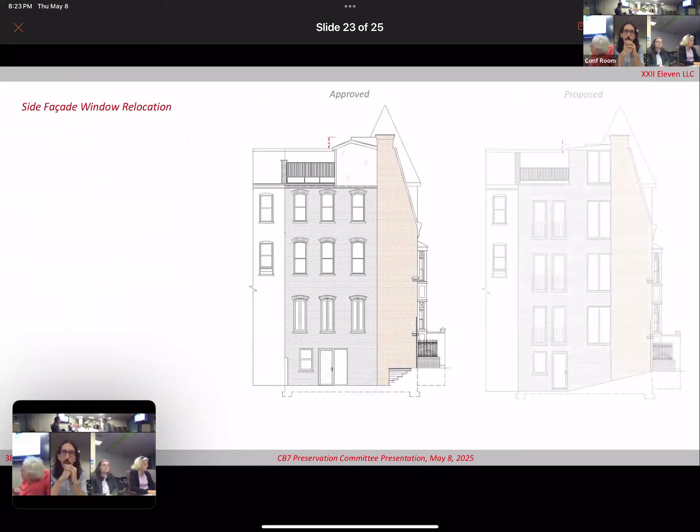Let's vote. I thought I saw when I was trying briefly to review the plans this afternoon, some reference to a rooftop addition where it completely eliminated the prior rooftop addition, because there was something about meeting the prior concern, but nothing now on rooftop addition. No, we scaled back the rooftop addition. We do have a rooftop addition, but it's completely within the mansard. It's completely invisible from the street.

That did clear the story. LPC approval, yes. Staff, yes. Oh, okay, so it was a different rooftop addition that was done, but it's not before us.

I just have one quick question, Jake. It better be quick. I think the rendering of the proposed gate, the gate itself seems higher than the rail. Never mind. Great, so it's not higher, it's bigger. Motion to approve the new entrance on the west end facade. All in favor? Okay, 6-0-0-0.

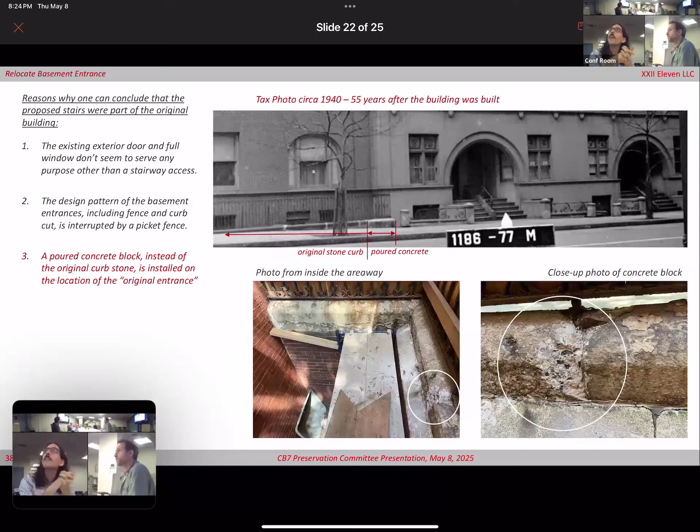So what I would ask is that people look at this and decide, to me it's not very visible, you can see it from an angle, whether you think it's appropriate or you don't think it's appropriate. I will speak for myself. I think that this is perfectly appropriate. The 9 feet of face brick, that darker red brick, has been maintained. It is so inconsequential to the rest of the building, which is so nicely detailed and has had a tremendous amount of thought put into it. So for me, if this came to us and someone said this is what we're gonna build, I would say that looks great. So that's my opinion.

I would like people to focus on this. Don't think about how we got here. I understand that it's very problematic how we got here. We dealt with that 2 months ago, we had a different building with a similar thing. If we don't want this to happen, we need to do a better job of wandering around and checking on sites ourselves. So again, looking at this photo, either you're okay with it or you're not okay with it. Would love to hear people's thoughts.

I'm with Adam. I think it's pleasing and it doesn't distract from the rest of the building, which would be my concern, but I think it's appropriate. For me, it's appropriate too, and we're not here to punish anybody. I appreciate that, I agree.

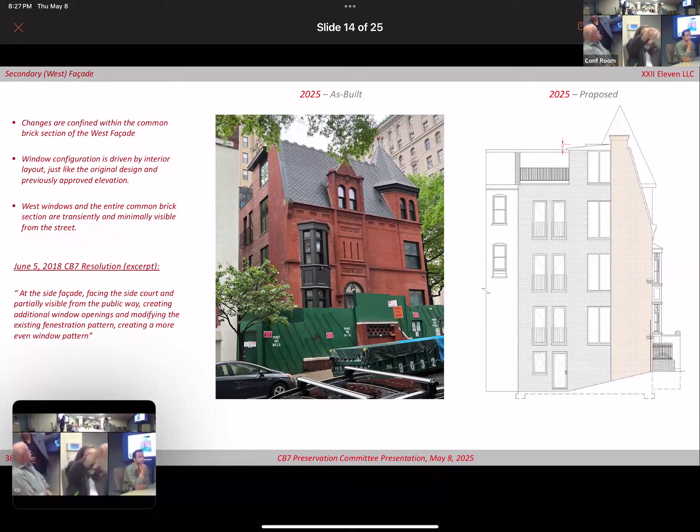What's behind the green? The hoarding - the building is still under construction, so we have to keep the construction fencing there.

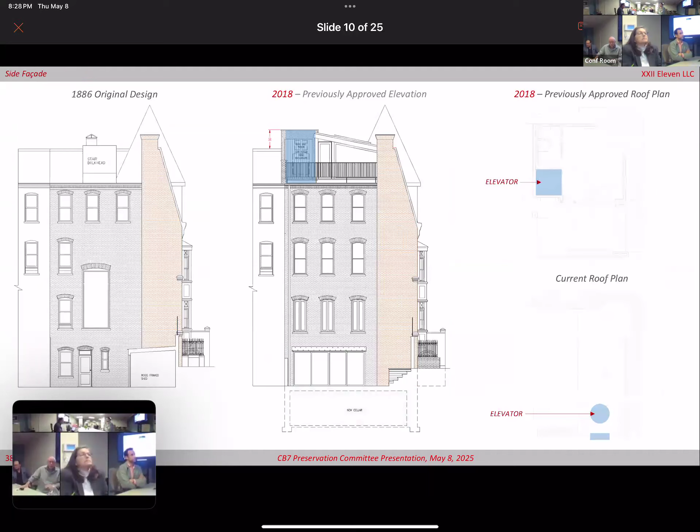What goes behind it? The windows on the right. I'll give you a glimpse of what's exactly behind that. The rendering shows you what's behind. In fact, I think it's better than the last one.

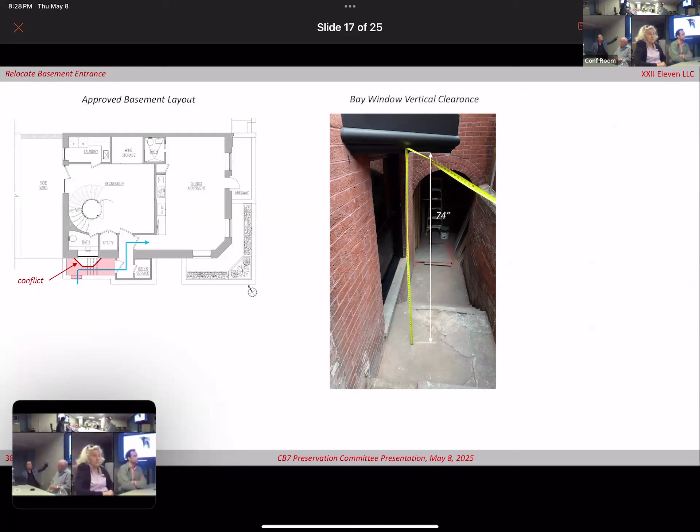This is the bottom that leads you to the cellar, or the basement - basically that's what's hidden behind that board. This is a picture from within.

I didn't take a picture of the main door, but we restored the main door to its original condition. I would recommend that you include that in your package to landmarks.

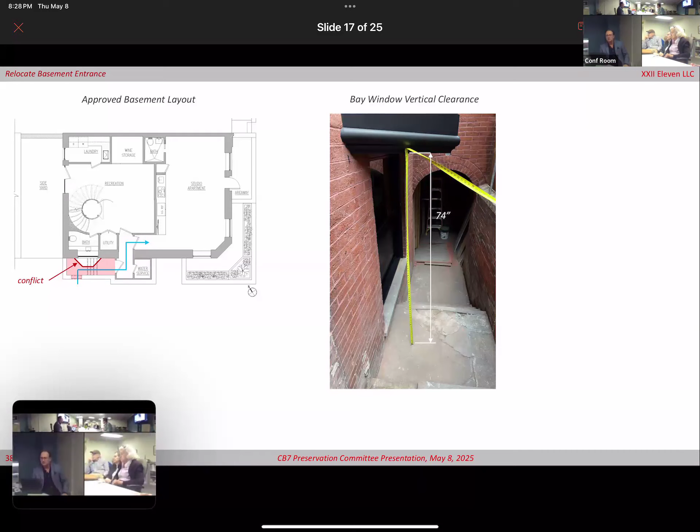Landmarks wouldn't approve anything. What are your thoughts? Well, I think I'm gonna lose this vote, but I just think this whole set of windows, and leaving aside how you got there, which is a pretty difficult story...

I just think this set of windows is so inappropriate to this building. It's a fairly wide side yard, about 29 feet, pretty deep, and as you're walking along 78th Street you really see this.

I appreciate that you've got nine feet of finished brick and then different brick, and all those arguments, but it's just a set of windows that is like the extreme that under pressure we might say yes to on a rear facade, in a donut, when they're not visible from a public way - but this is very visible from a public way and just wrong for the building.

So I'm a no. Okay, I'm gonna put a motion on the table. I didn't realize those windows are new, and I'm in your camp.

Okay, yeah, we're gonna lose. It doesn't matter, we've done our work. I'm gonna put a motion on the table to approve the west side yard facade as appropriate. All in favor? Against? What do we have here? Four-two-oh. Okay, got it, thank you so much.

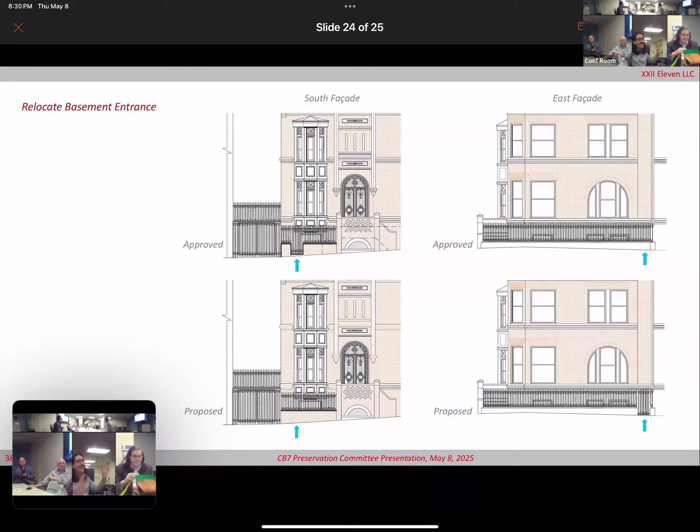Okay, and this is my personal thing, not committee opinion - like the colorized version of the 1939 tax photo. I was like, I don't know how I feel about this, but we'll risk it with LPC and see what they say. We shared this with them yesterday and they seemed pleased with the presentation.

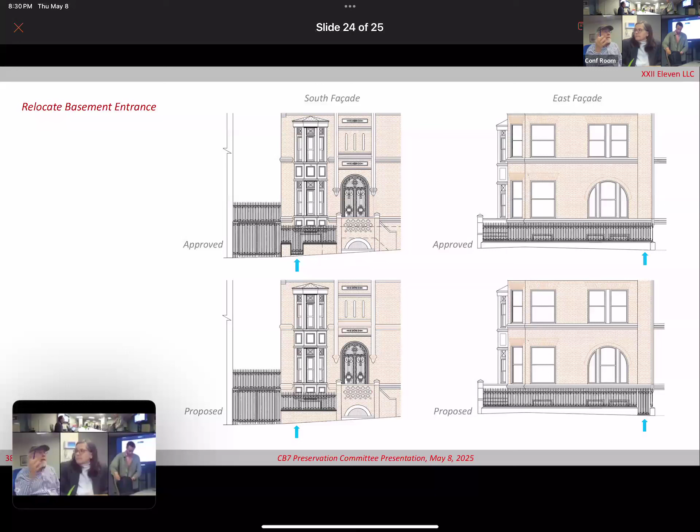And I just want to say, this is a beautiful building, it really is, and you've taken something that was bordering on an eyesore and made a gift to the neighborhood. I live on West End Avenue and I really appreciate what you've done, especially with those two.

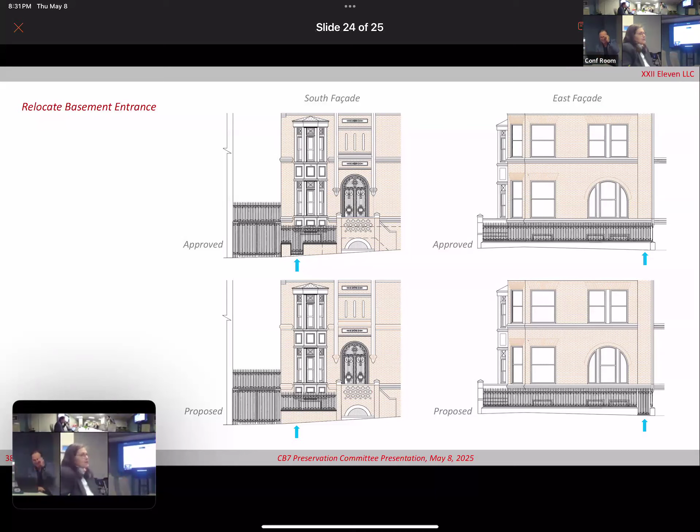Thank you for your support. We really tried, we're almost there, and we really needed this support to finish off this project. It's been quite long, but I appreciate it. Thank you for your patience. Of course. Remember, God is in the details, okay? And that's one of the things with you.